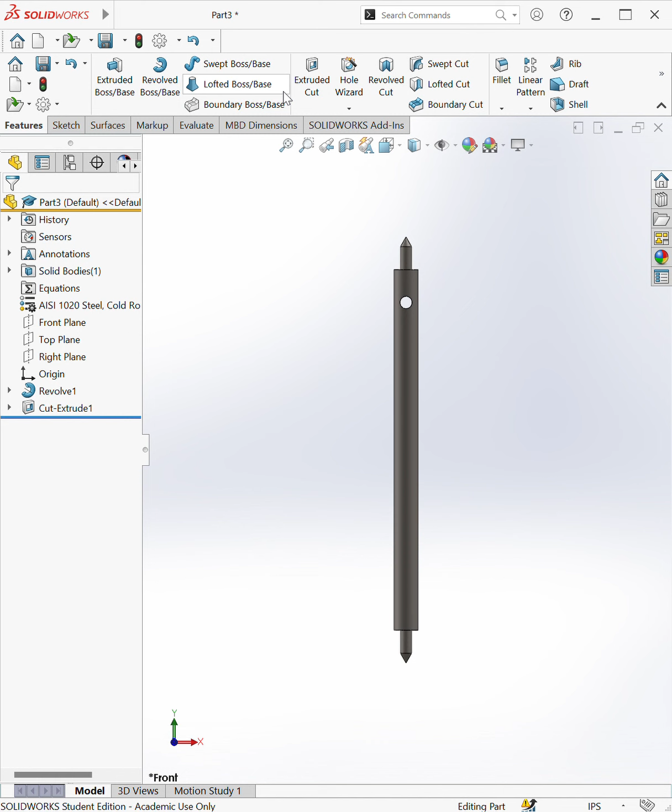So now we're going to add the material of cold rolled steel. Apply, close. Okay, so we're done with that. Save the part, Control S, as spindle. Since I already have a spindle, I'll save it as spindle 1. And we're done with the spindle.

So now we have these two parts to go, and then this ring. This part is basically the upper bearing. Okay, so new part.

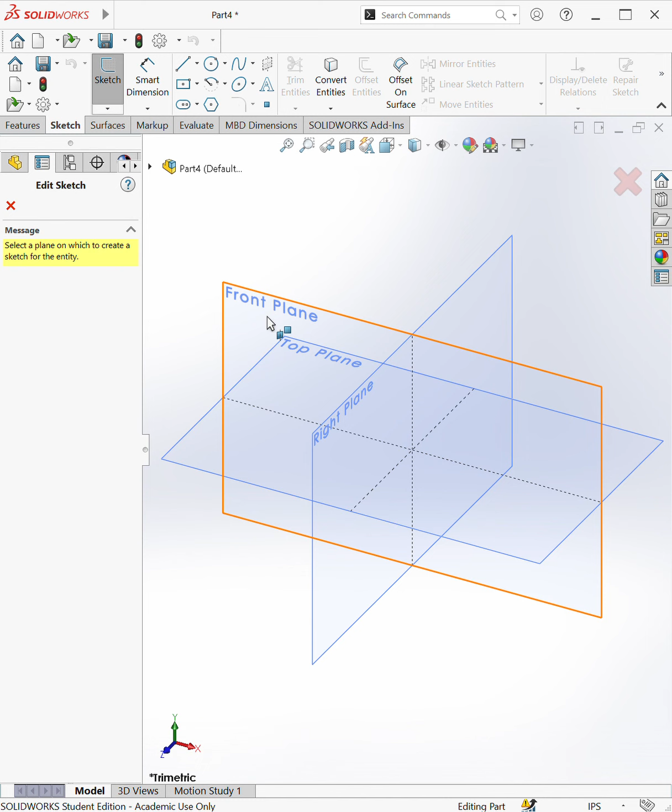Sketch on front plane. Okay, so we're gonna do revolves for both of them. They're both very similar, so yeah.

So what I'm gonna do is actually do a midpoint line here because I want it at the center. Actually, never mind, messed up. You want to really worry about design intent on the way you do things in SOLIDWORKS, because the way you do things really affects your final result and how much you can change your final result.

So try doing a center line with infinite length going vertical because we're going to revolve it later, and make the sketch for this. Ignore this hole for now and ignore the hidden lines. We're not going to worry about the thread, as it says here.

We're going to not do that call out. So just make the outline of this. Also don't worry about this because it'd be a cutout through the entire one part of the cylinder, not a hollow tube. So pause the video and see how you do. It's very simple, it's just this.

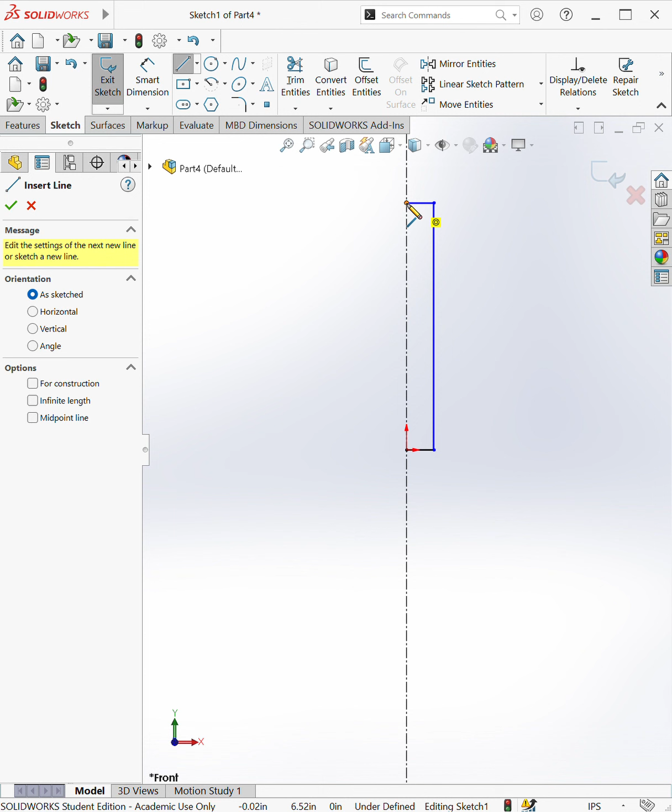If you want to avoid the intersecting error that we got last time when we were doing the spindle, you can complete the rectangle to make a full line. And now we're going to do the dimensions.

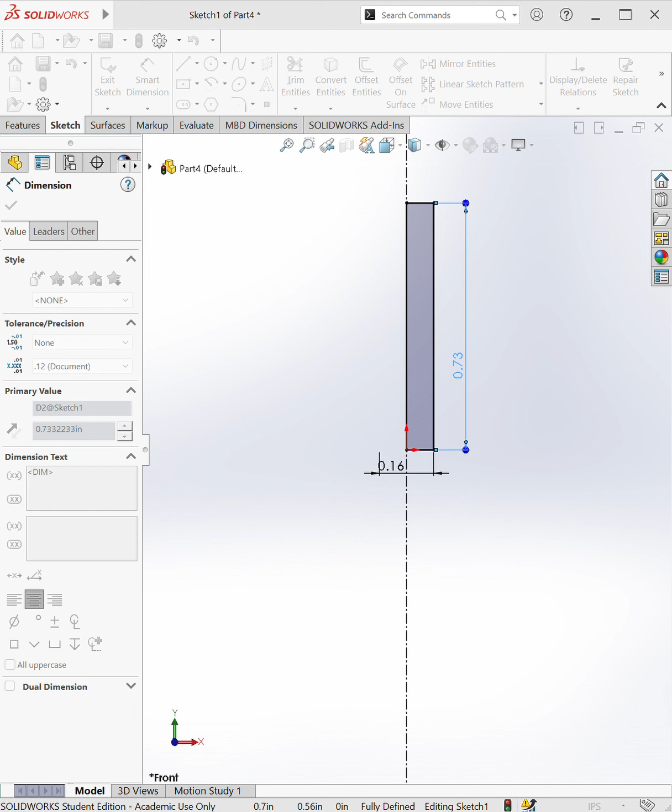So the width, or the diameter of this, is 0.164, as it says here. And then the height of this, you might say it's 3/4, but that would ignore this top part, which we also want, which is 0.125. So what we're going to do is 0.75, which is the 3/4, plus the 0.125, and that would be the revolve feature.

So we can do the revolve, that's okay, and we're almost done. We want that little cutout and then that hole. So to make that cutout, we're going to do a sketch on the front plane, and then Control 8 to normal to, and make a corner rectangle.

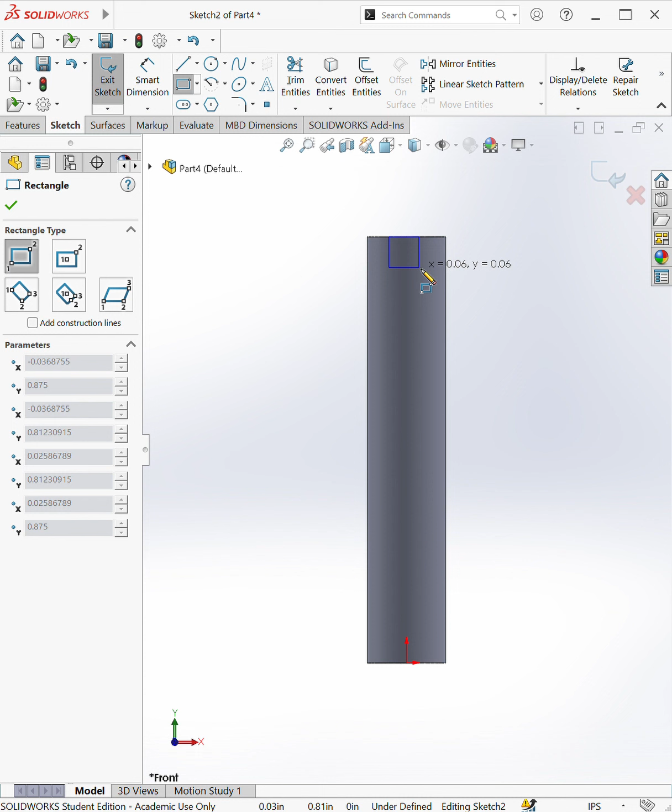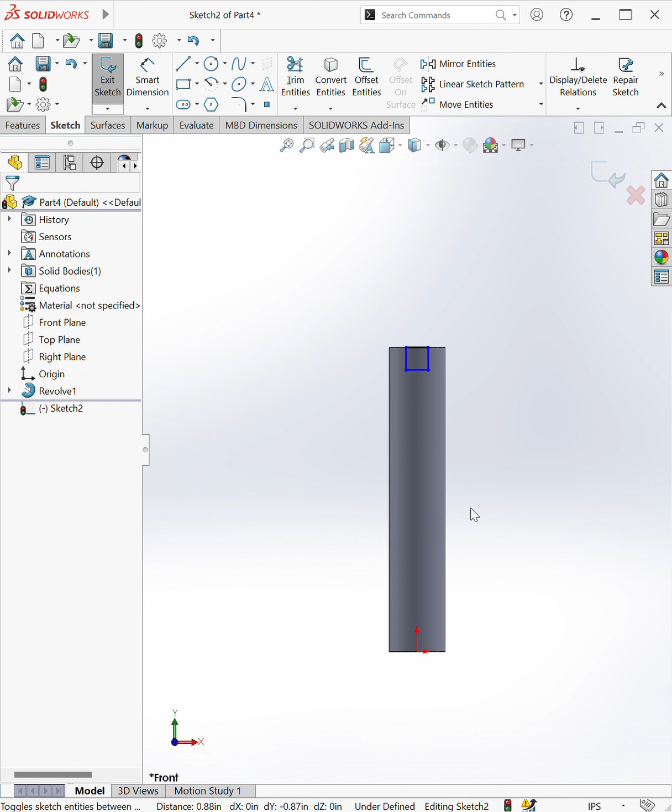Okay, and now we're going to dimension this. So the width is 0.055, and the height is 0.07.

Okay, now we're going to do an extrude cut. What's the trick then? Through all, both again, and press OK, and we got that little sketch cut out. This is what we want here. As you can see in the assembly, it would look something like that.

Okay, and now we're gonna worry about the little hole at the bottom. To do that, do the hole wizard, and for this one it would just be a normal hole. For the end condition, put blind, because it wouldn't go all the way through, it would go only to a little area.

And then here you should show custom sizing, because we're not going to use any of the sizes provided. So for the width, we're going to say 3/32, as seen in the diameter here. It would show a yellow highlight once you click enter, meaning that you changed or modified the dimension. And then for this, let's leave it at 118.

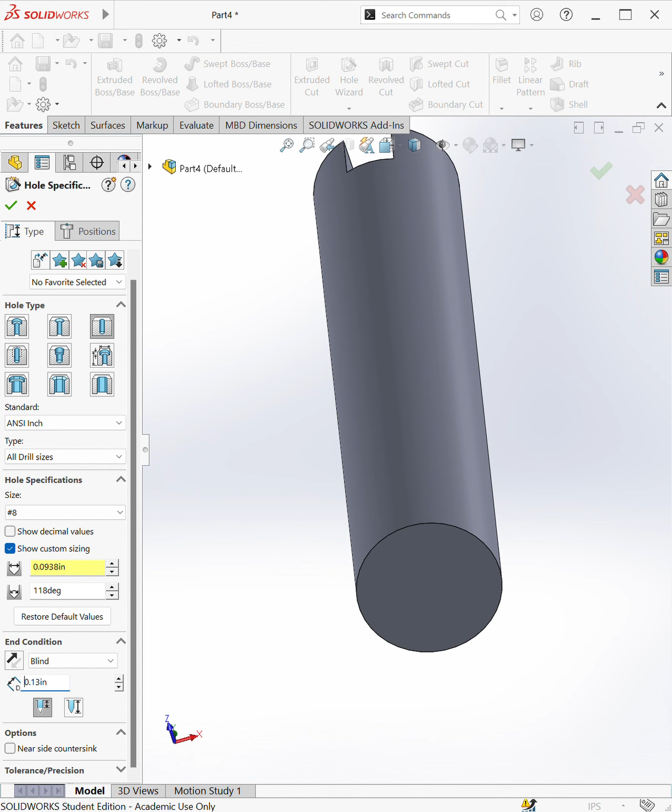For this value, it goes 1/8 inch deep. Type that in, and now go to positions. For positions, you want to click on this face and just click the origin point and click OK. And that would be it.

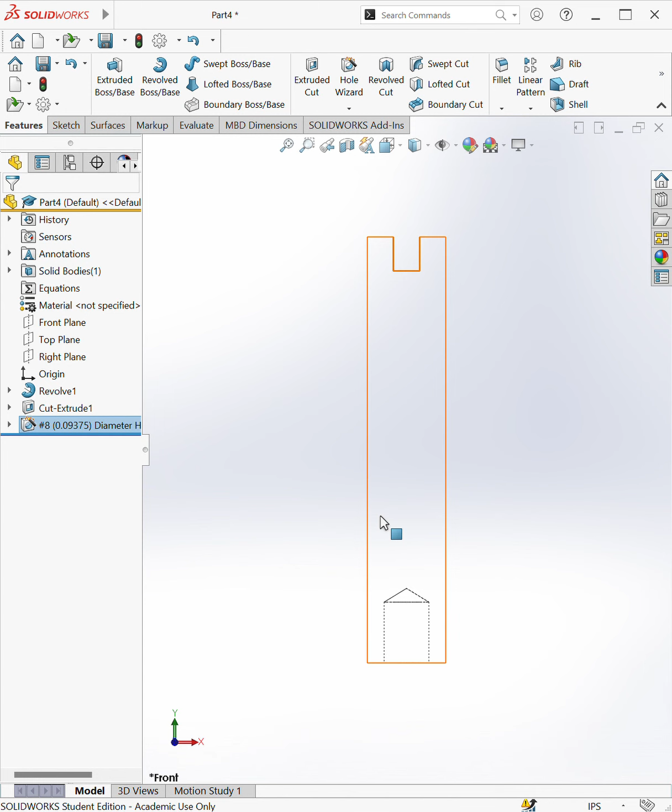If you want to see how the hole looks compared to this, go to Control 1, which shows you the front plane. Here you'd say display style, and you can see the hidden lines visible with hidden lines feature, and you can actually see the little hole that you created. Switch back to shaded with edges, Control 7 for isometric view.

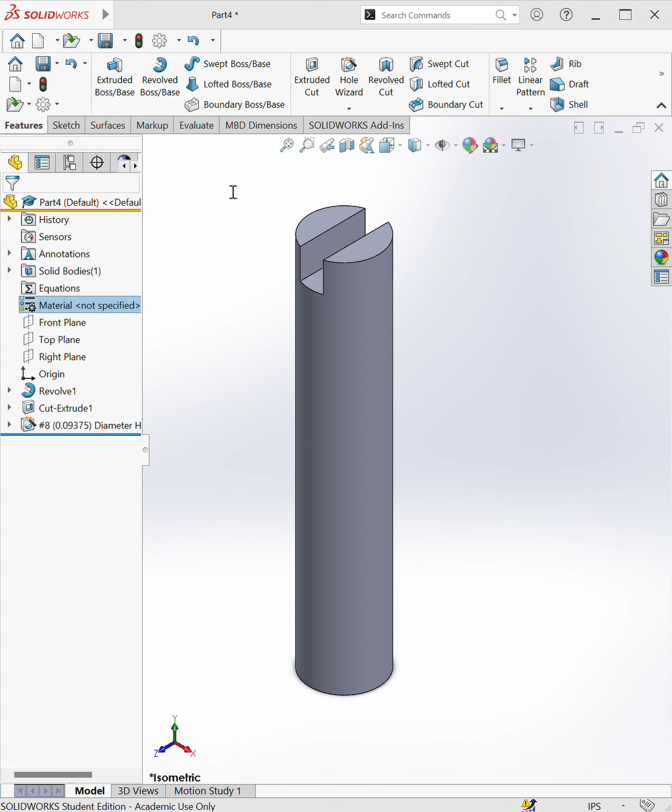Now we're going to write the material we want. In the assembly it says the upper bearing is brass, so we're going to put that. Edit material, brass - way too big. Another way you can do it is actually just right clicking, and here you'd see brass, and you can click that.

Control S to save and name it upper bearing. Since I already have an upper bearing, I'll name it upper bearing 1.

Okay, now almost at 2 more parts. We're going to do the lower bearing. It's very similar. So try yourself, and if you like it, then resume the video and see how it's done.

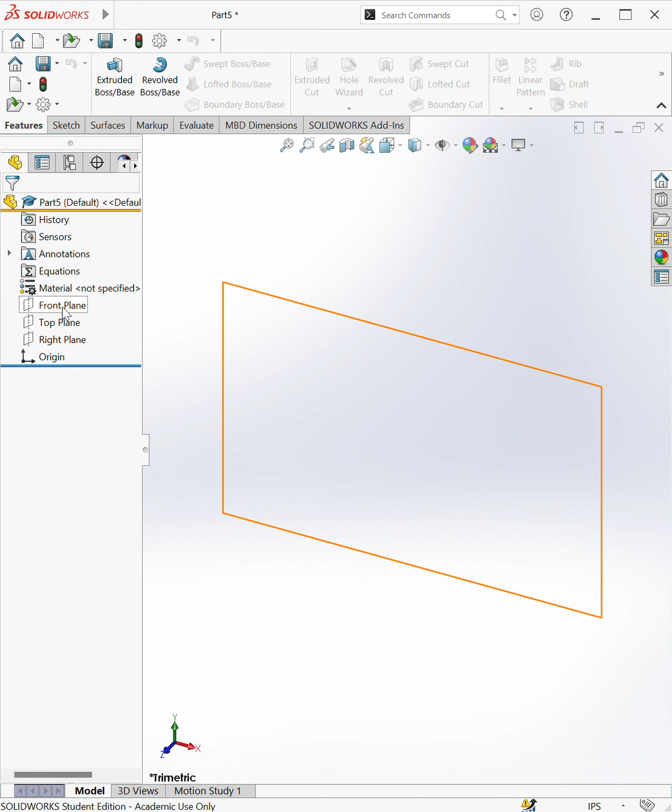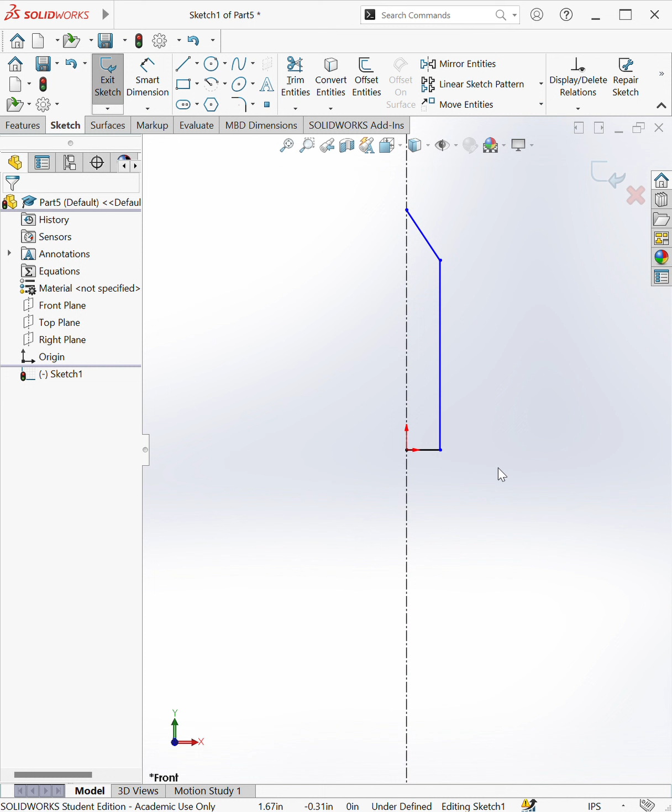First, we're going to do the front plane. Sketch, and then again do the center line, infinite length, vertical, and do the little thing, and then this one actually converges at a point, so put that. And now this point is also 60 degrees, so half of 60 is 30. And then the entire sketch is 3/4.

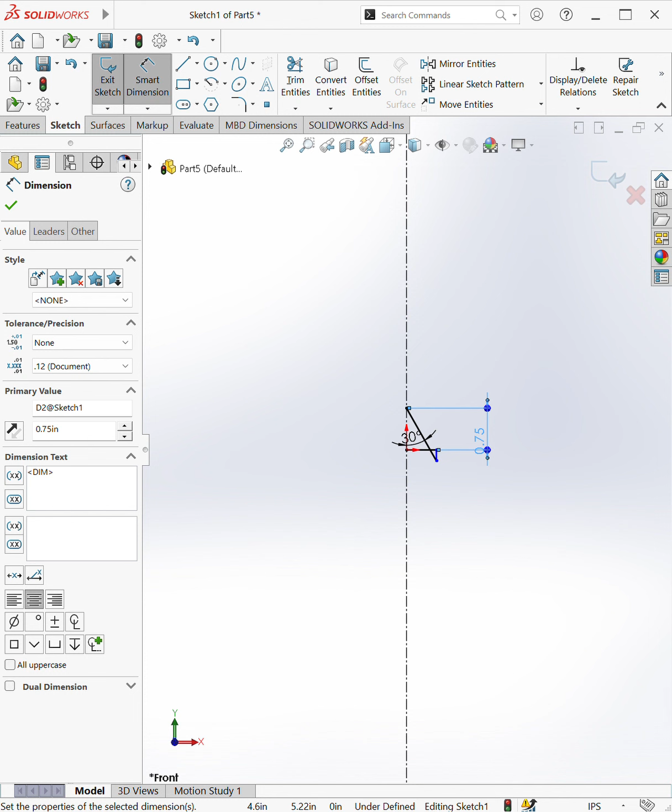For the width, it doesn't actually show here, but assume that it's the same as this width, or this diameter, which is 0.164. As you can see, my sketch kind of messed up. Don't worry about it, you can just drag the points around until you think it's right. It happens a lot. So to make this, you can click on the line, click on the center line, click on the opposite end, and do 0.164.

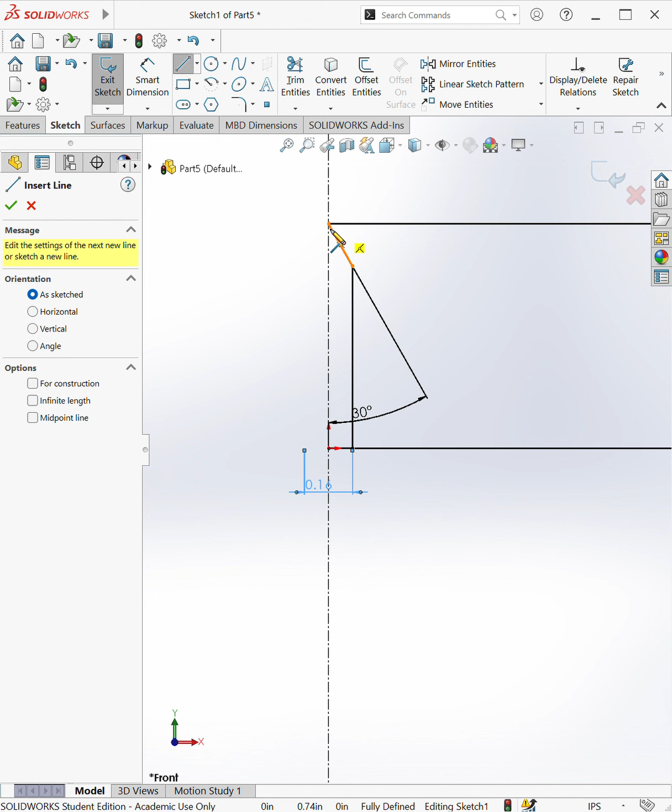Now if you don't want the intersecting error, you can just click yes if you want, but if you don't want to see the error ever, you can just close it. Now go to Features, Revolve Boss Base, and click OK.

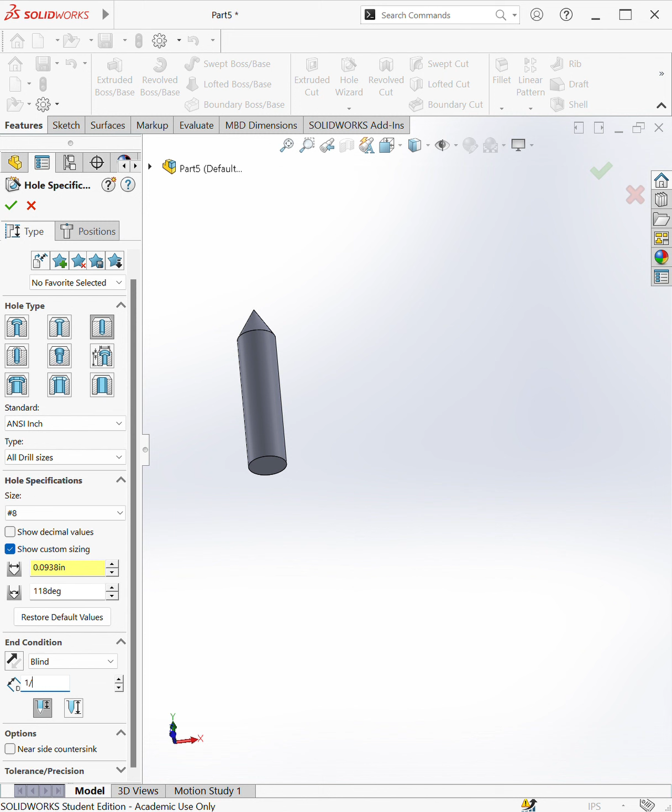And then positions: look at the face, click the origin, click OK. If you want to see how it looks, go to Control 1, Display Style, and click Hidden Lines Visible, and you can see the little hole that you created. Again, don't worry about the hidden lines on the sides - those would be the thread callouts, not necessary for this project.

Control S - actually, let's save it first. Lower bearing. And since I have a part named lower bearing already, I'll name it lower bearing 1.

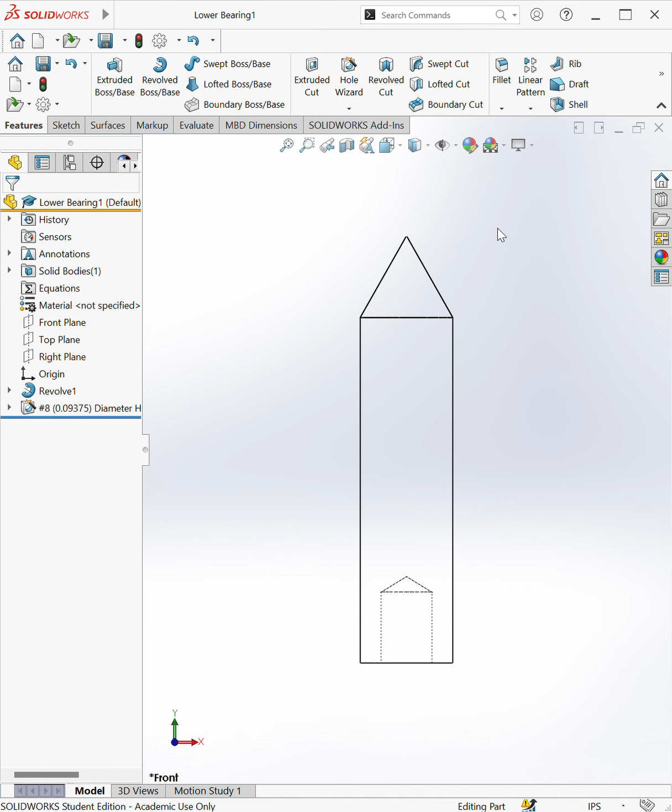So again, go to your solid display state, Control 7 for isometric view. This one is also made of brass, so you can either go to edit material, search for brass, or just go right here and click brass.

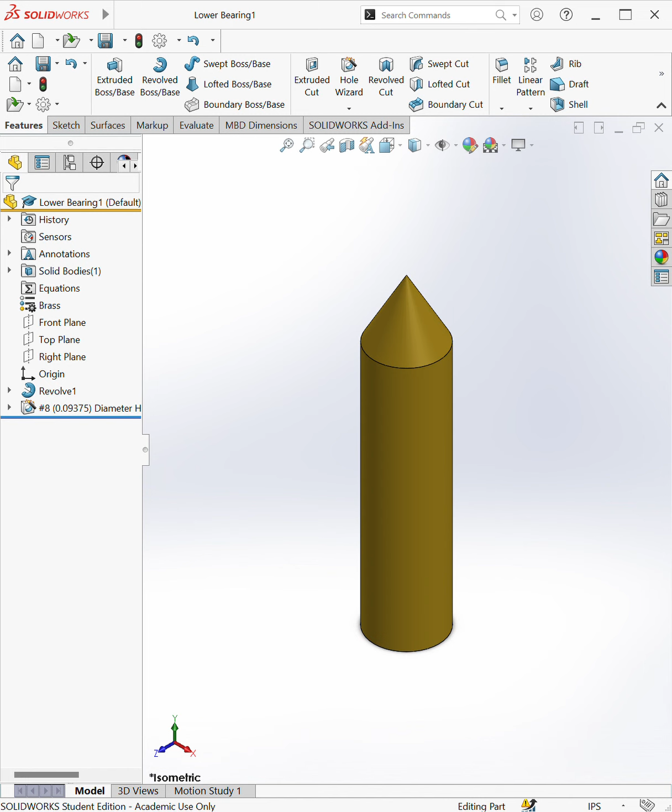Control S. Okay, final one is the ring, easiest part to make. So new part, IPS. Okay, try doing this.

It's pretty easy to do. If you are having trouble, you can watch the video.

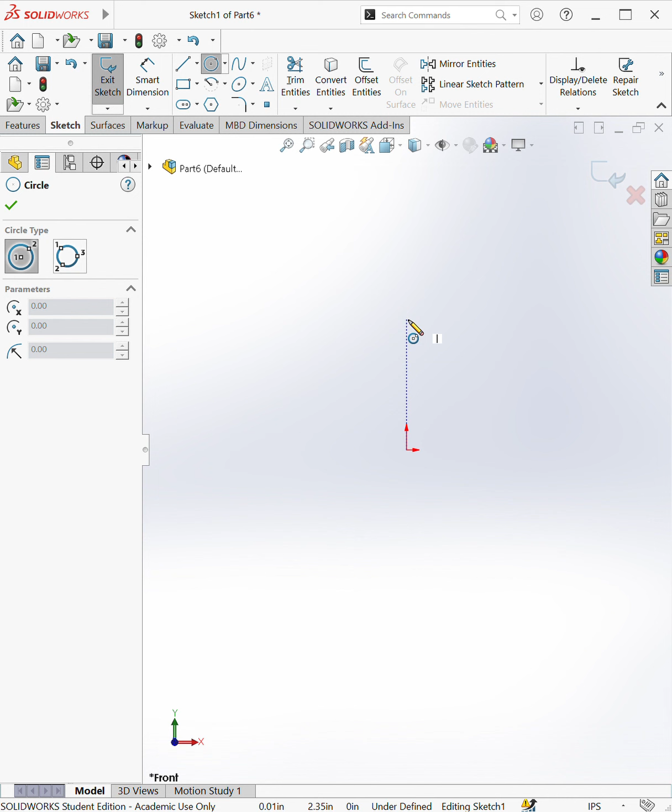Now go to front plane, sketch, circle, make it vertical when you see the white vertical relation, make that circle, and then actually put that relation in. So click the center point of the circle and the origin, vertical, and then dimension it to be the radius of 1.95.

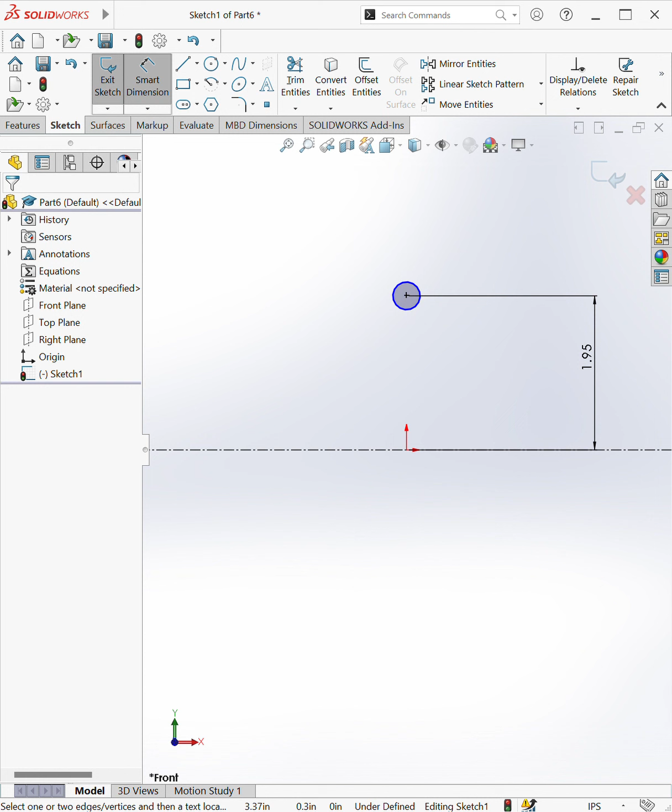You also want that center line for revolve, so go to center line, infinite length, and then make that horizontal line. And now we also want to dimension the diameter of the circle, which is 5/32.

A question I was asked is what these lines are for - they're just sketching lines, don't worry about it. So now that's it, we're done. We can revolve the boss base around, and you would see the circle.

And that would be that. The outer ring is also steel cold rolled. So edit material, cold rolled, apply, and save this as ring, or gyroscope ring 1. Or for me it's 1 since I already have the part. Okay, we are done with the parts.

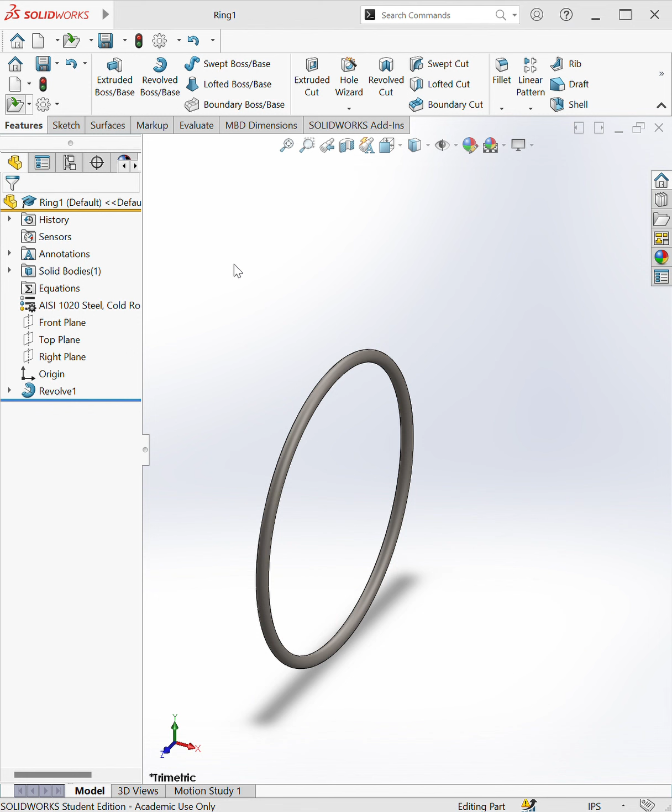But we are not done yet. We still have to do the assembly, which is really hard to do. Go back to this frame, so click open and go back to your gyroscope frame. What we want to do is make some references to make it easier on ourselves.

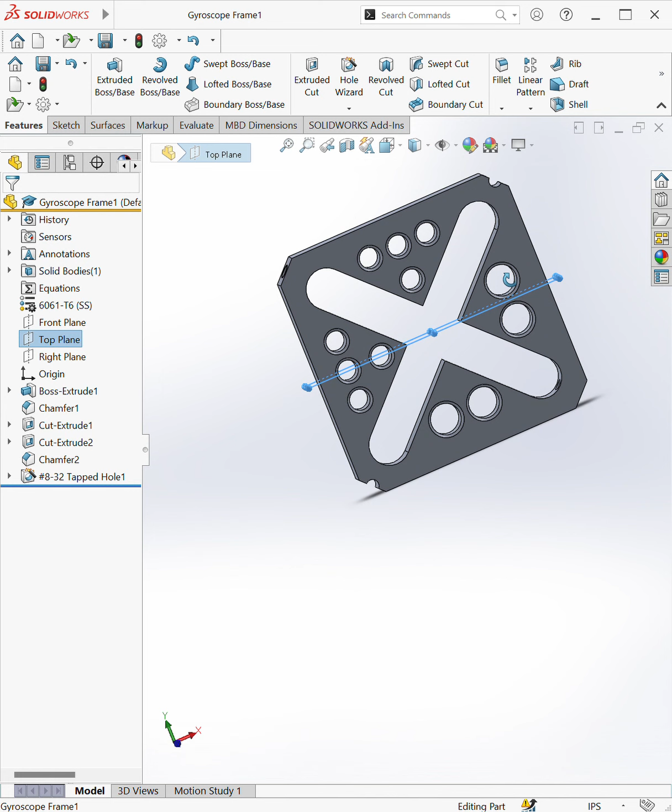As you can see, the front plane is actually at the side over here, which isn't really good since it doesn't show us anything. The top plane is right in the cross section of where we want it. We want our top plane to actually be here. The right plane is this way when we want it to be here.

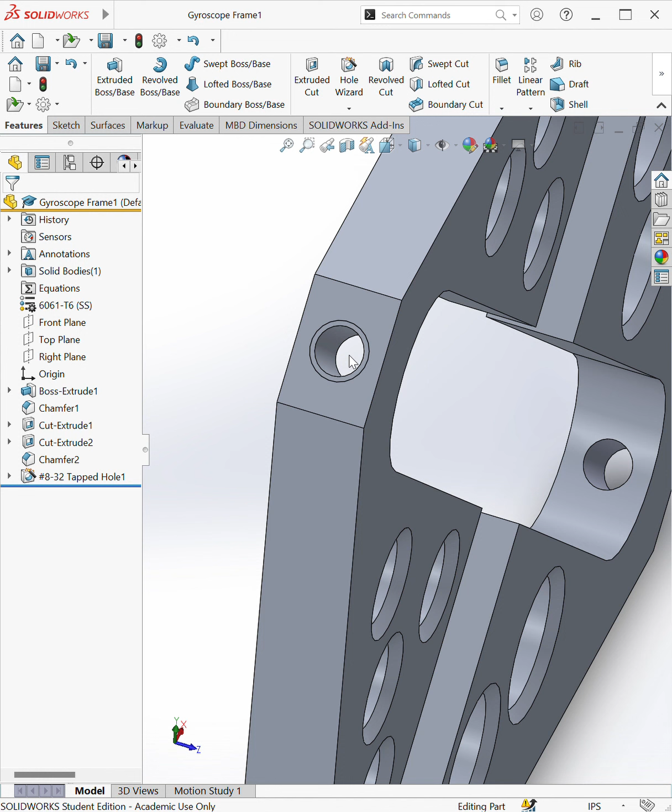So we want to change those references, or make new ones, to make it easier to do our mates. Another thing is it's really hard to do a concentric mate, so maybe we want an axis to go along this edge. Let's do that.

This is the main tool we're going to use for the rest of this: reference geometry, then click the plane function. We have the first reference, second reference, and third reference. Usually we're just using the first and second.

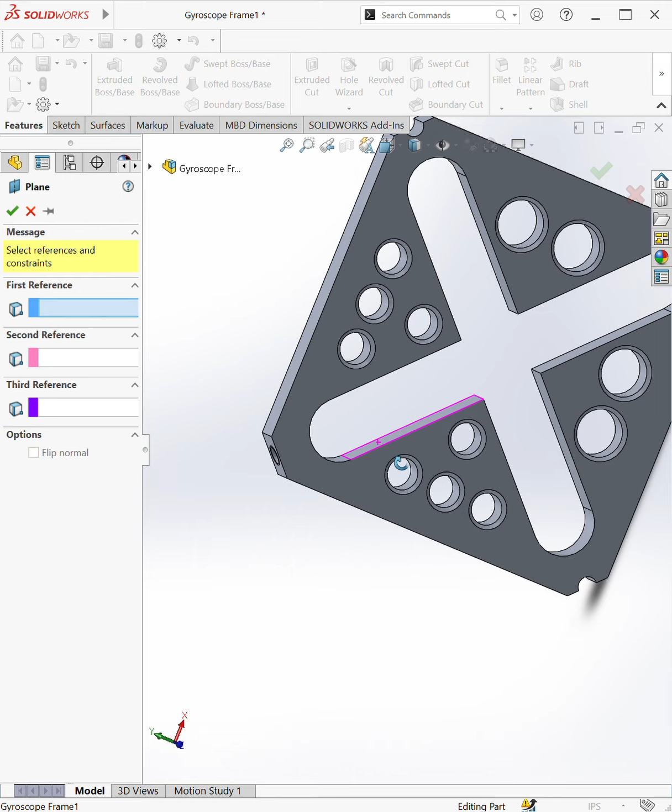So here we want to have this plane in between. That's going to be our top plane. Or actually this way, right? Because the spindle would go this way and the rotor would turn this way. So this is going to be our top plane.

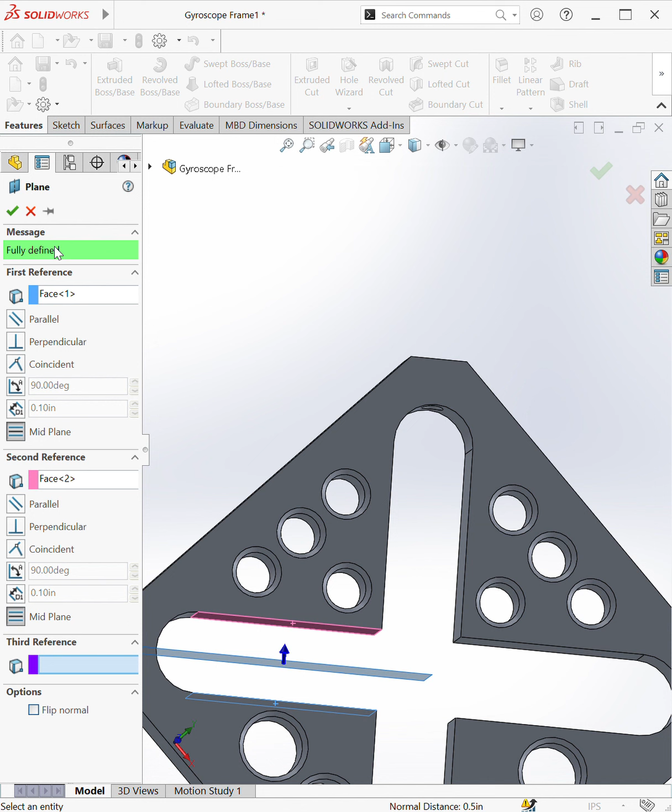To make that, click the bottom part of your frame, then the top part of your frame, then click OK. It says fully defined in green, meaning we're good. If you want, you can drag it out to make it bigger. And if you want, you can click, pause a little, and click again. Now you can rename the tree item. Make it top view.

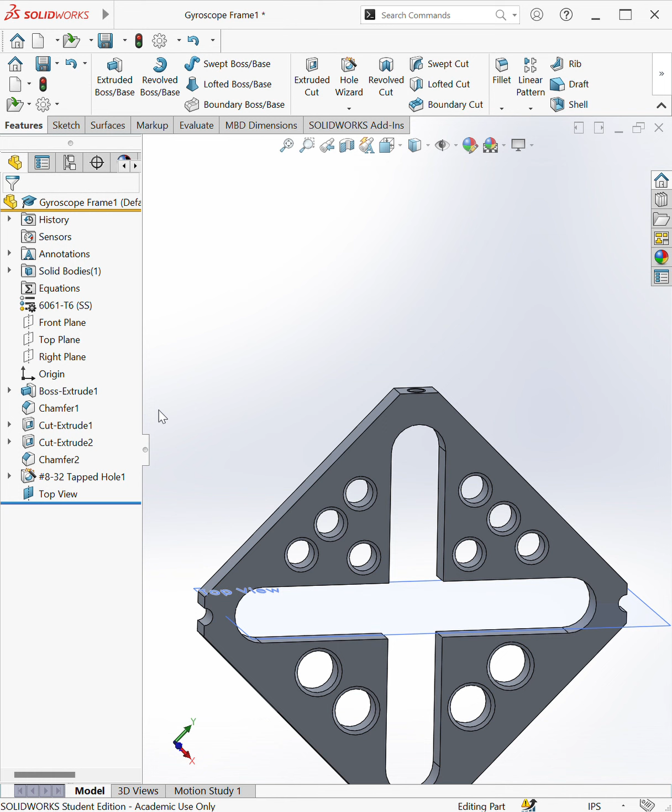Now try doing the same thing with front, which is going to be in the middle of these two plates, and the right view, which is similar to what we did for the top view.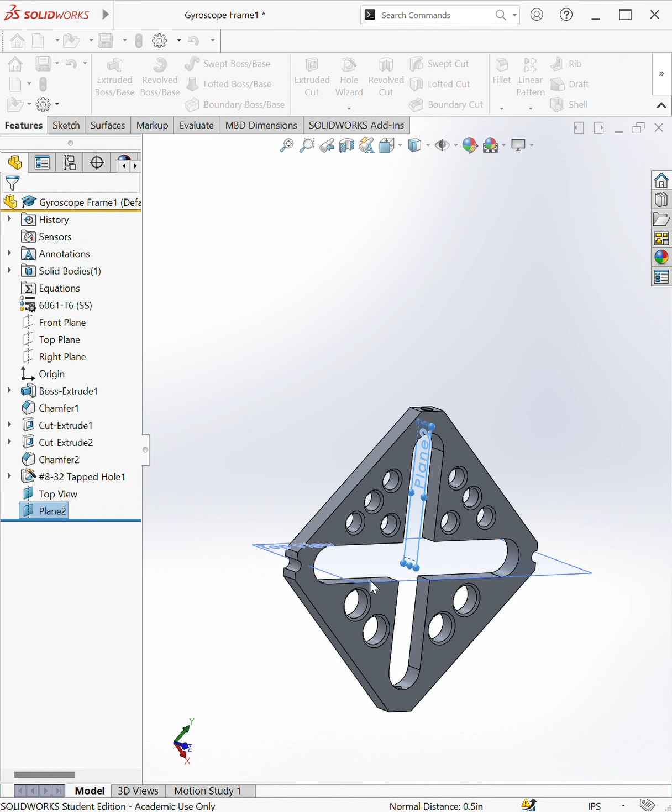Now I'll show you how it's done. So, right plane now. For that, we're going to click this, and click OK. If you are having trouble, maybe you should exit and try again. So click, pause a little bit, and click again. Sometimes it doesn't work, you can pause again and click again, and it would usually work.

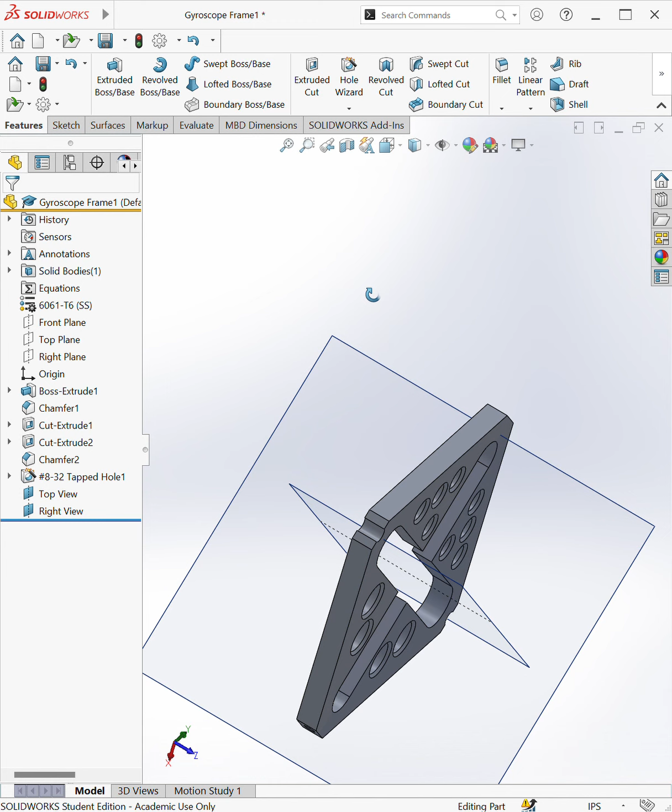Right view, and click outside. Now you got your right view done and top view done. Now you just want your front view. To do that, go to reference, plane, click the front part, the back part, and you got your front view there.

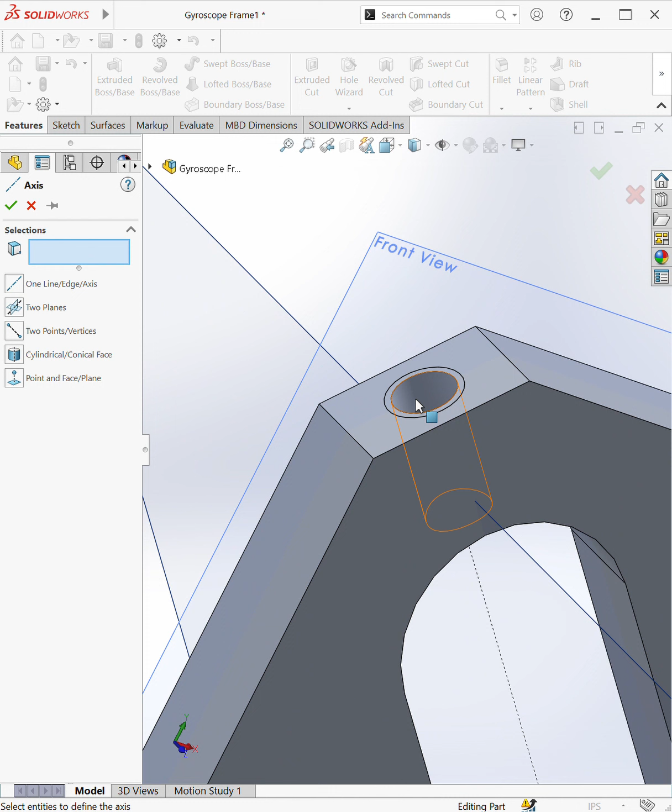Click front view. Alright, we're done with the planes. Now we can do the reference axis. Here, just click this little circle and you'd be done. If you want, you can drag it out so that it's easier to see. I know it looks like a mess here, but trust me, it's so much easier to use these than to do anything else. Okay, now save this part. If you do any more reference geometries, you could do it if you want. Always remember to save, because SOLIDWORKS crashes and yeah.

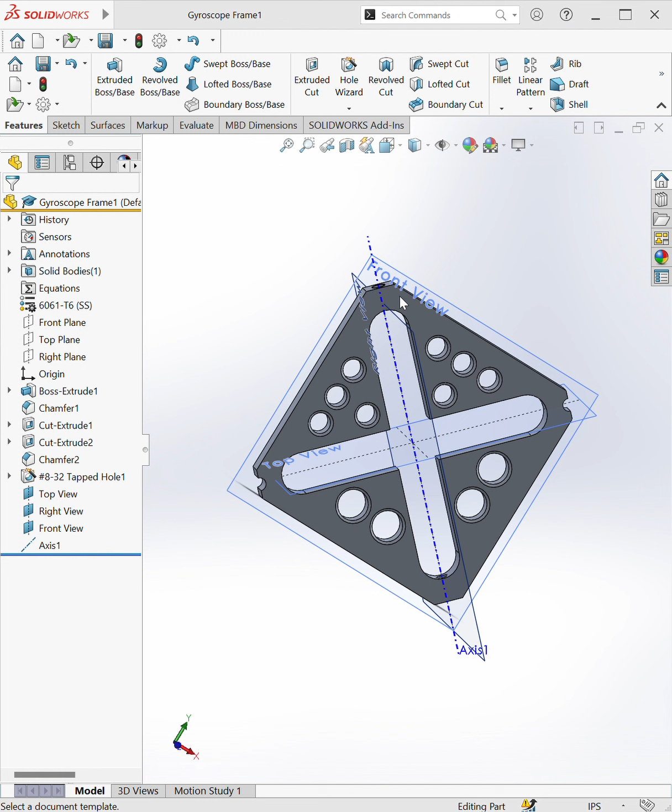Okay, so now open another part, which is... actually, I think we're done. That's all we need to do. We can do it in the new, right next to the drop down menu, you can say make assembly from part, and then click on the assembly. And the first thing that's going to show up is the frame, probably. If it doesn't show up, just click the OK button here, and usually it does show up.

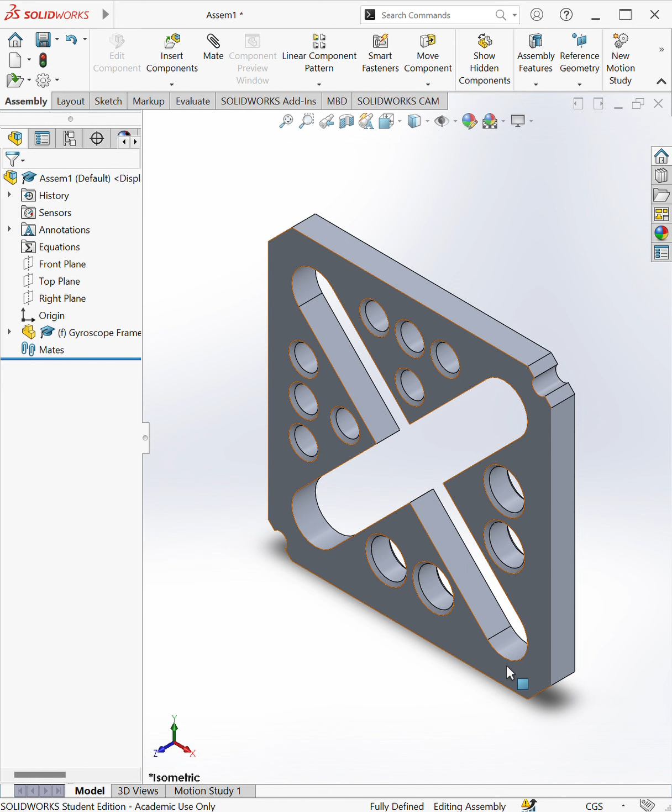So right now we have a problem. You see the F in parentheses, that means this part is already fixed, meaning you can't move it. But in the isometric view, which we're in right now, it shows as if it's turned. We want it to be this pointing up and this pointing down. It's showing this because the front plane is actually coincident with this front plane, top plane with this top plane, right plane with right plane. We don't want that. We want this front plane to be with this front plane, this top with this top.

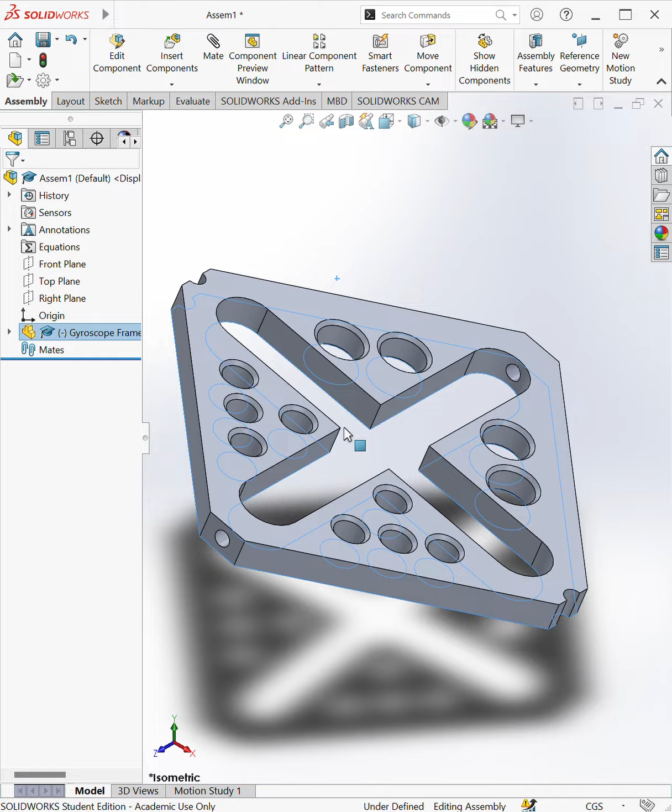To do that, we simply right-click on the part, float it, so that means we can move it around, rotate it however we want. Left button to move the part, right button to rotate the part. Mouse buttons. Okay, now we want to fix this, right?

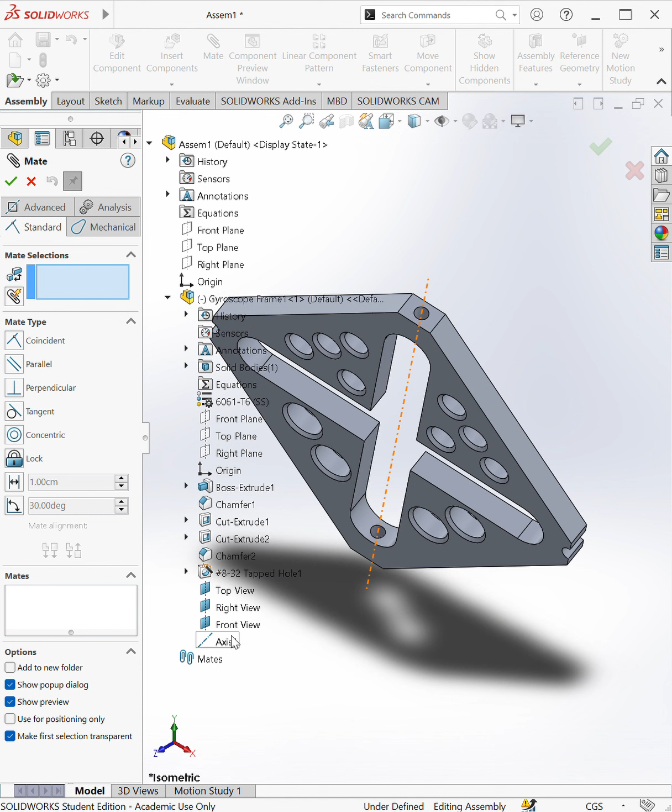Click on the mate function, and now go under this feature tree, go under Gyroscope, click the front view, and make it coincident with this front view.

This menu pops up, just click OK. Right view with this right view, click OK. You can also click the OK over there. And then top with this top, and then it should also be coincident. Click OK.

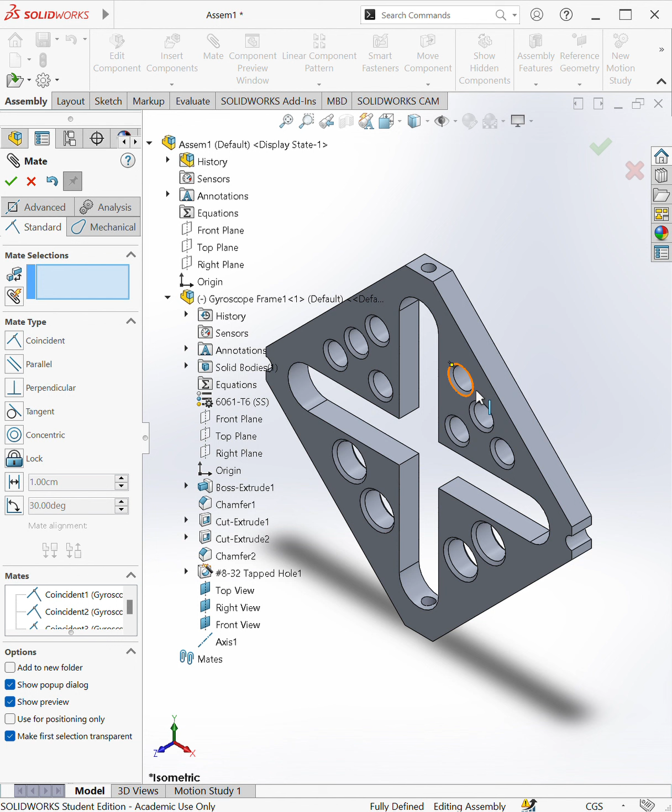Okay, now our frame is fixed. You can't move it anymore. I'm trying right now, and you can't rotate it or move it, meaning it's fully fixed. If you want, you can exit the mate tool by clicking the X or the check mark. It doesn't matter. If you also want, you can actually fix it so it doesn't move anywhere.

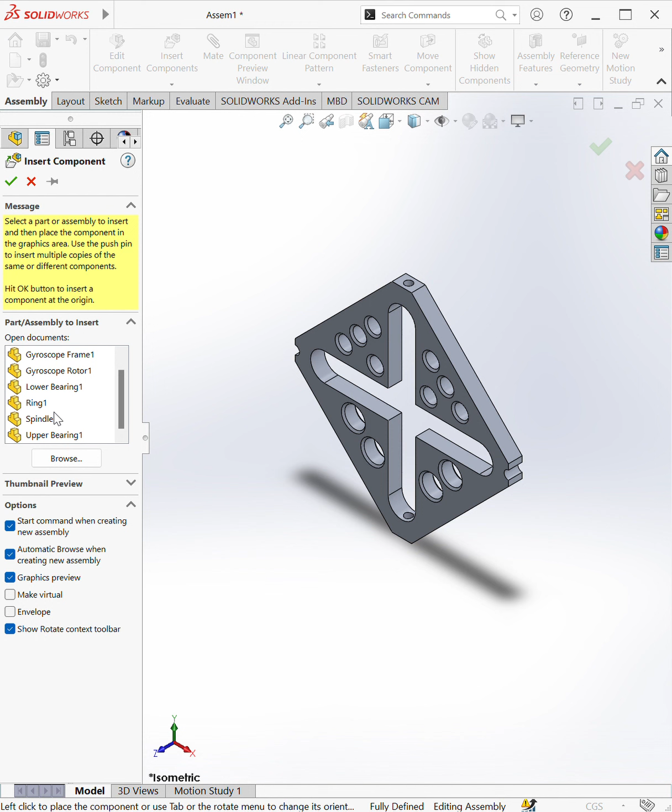I'm not going to do that because I trust my mates. I can do another insert component, and now we're going to put in the rotor, this one. You can click and drag to put it in, or you can just click, release, and then click wherever you want to put it in.

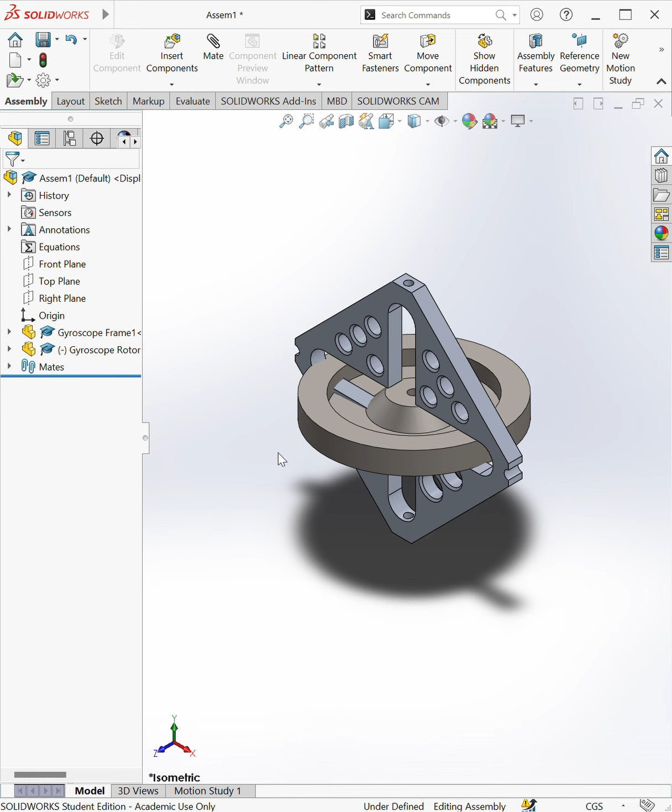Okay, I'm going to rotate this part to be like what I want it to be, like that, and then move it a little bit to be about where I want it to be. Now remember when I said I wanted it to do a midpoint line because the plane will be right in the middle, which makes it easier doing assemblies.

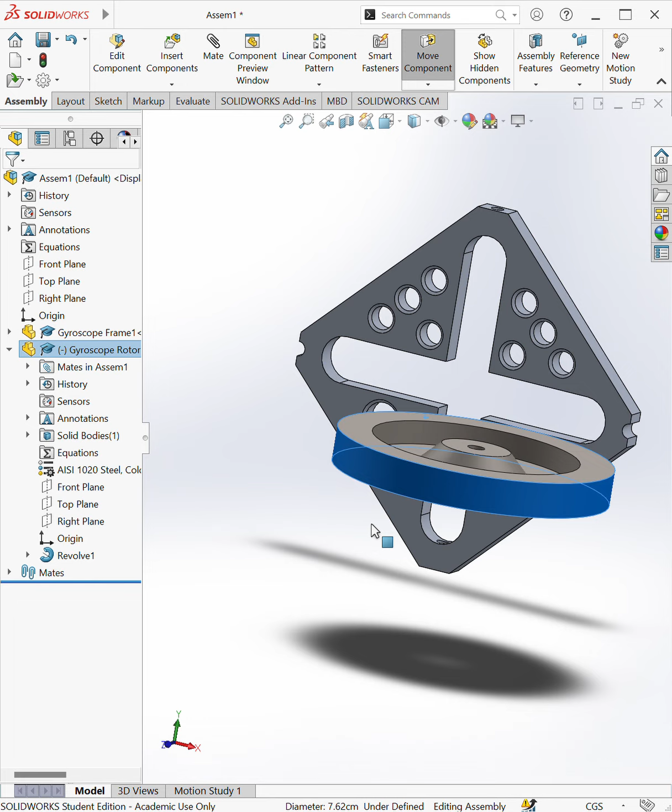Now you can use that. This front plane is actually coincident with this top plane, and that makes it so much easier. Now it's like coincident. It won't go down. It would only go sideways.

And the second thing we can do is in the gyroscope frame we have that axis button. That axis, click that, hold control. This is how you can do mates outside of the mate function. You can hold control and click the two planes. Like let's say I want to click this and I hold control and click this. I can do, and then stop there and hover for a second.

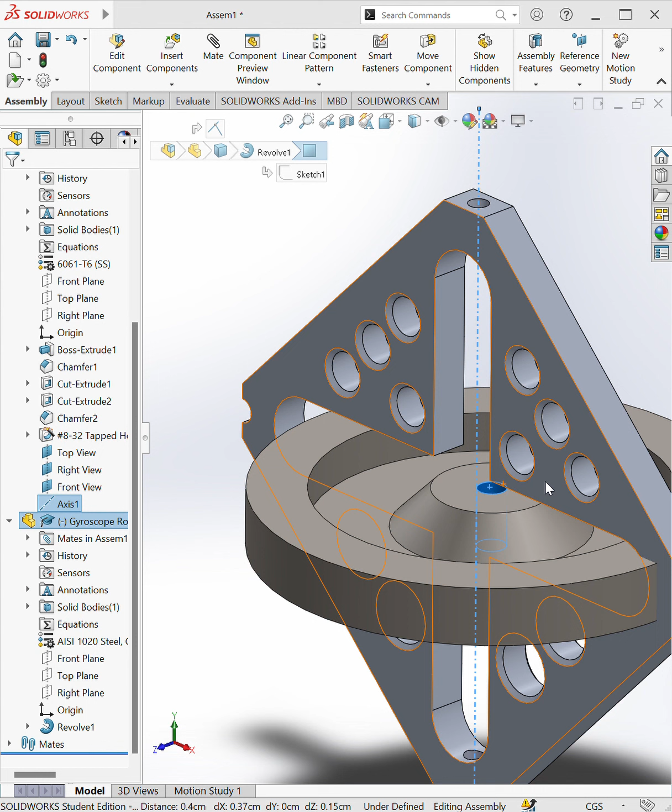It'd show me this mate toolbar. I would do concentric here, and now it's like axial with this, meaning it can only turn, but it can't move anywhere. We want it to turn because that's how gyroscopes work, but we don't want it to move because that's not how gyroscopes work.

Okay, so now we can insert one more component because this component is done. Let's insert the spindle. I'm just clicking it and then releasing here.

Okay, so now we want this spindle in relation to this rotor. So whenever this rotor turns, we want the spindle to also turn. To do that, you can click the face of this and then click this face as well, or any circular thing here, and hover for a second and you would see that mate toolbar. Click concentric, and now it's concentric, but it slides up and down.

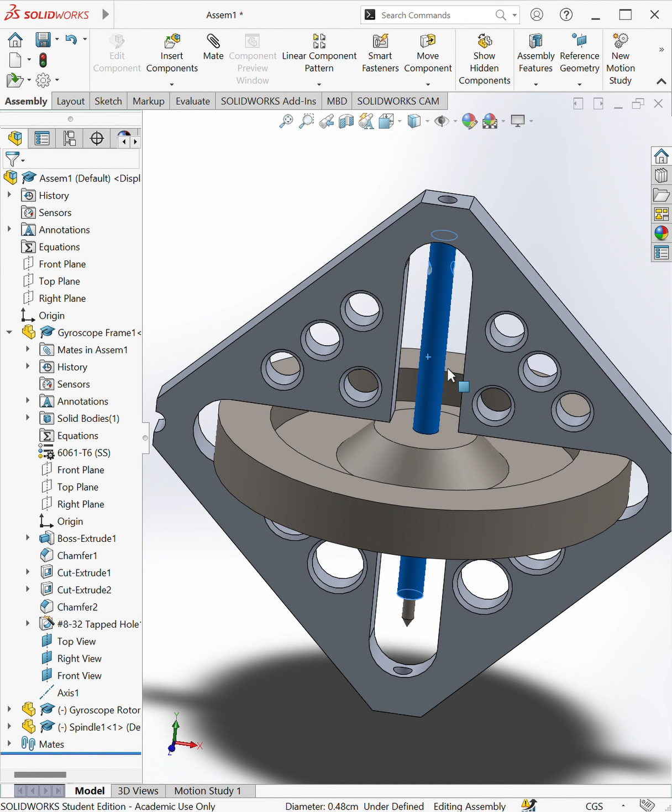That's fine for now. Okay, what you want to do here is go down to the mates function, and here you'll see all the mates that you did so far, all the coincident mates and concentric mates. Go to the bottommost mate, that's the mate you just did, which is the concentric mate with the rotor. Right click that and say edit feature, and here you can do a lock rotation.

This means that this rotation is locked. The concentric mate will not move, meaning whenever you turn the spindle, you also turn the rotor, or whenever you turn the rotor, you also turn the spindle. They're locked in rotation. So now, whenever I turn the spindle, it turns, or whenever I turn the rotor, it turns the spindle. Whenever I turn the spindle, it also turns the rotor.

But now it still moves up and down. To solve that issue, you can go down to drop-down menu. We'll exit this for now. Go to spindle, and then you see when we did that mirror, what it allowed us to do is our top plane would be right in the middle of our spindle. So we can do that, and then make it coincident with this top plane, and click OK. And now it's not going anywhere, except turning like it's supposed to.

Okay, now we're going to insert another component. Sometimes it's good to clean up by pulling up the drop downs, so it's easier to see like, oh, this is the frame, I'm done with the rotor, I'm done with the spindle, and now I can insert component. And then let's do the ring first.

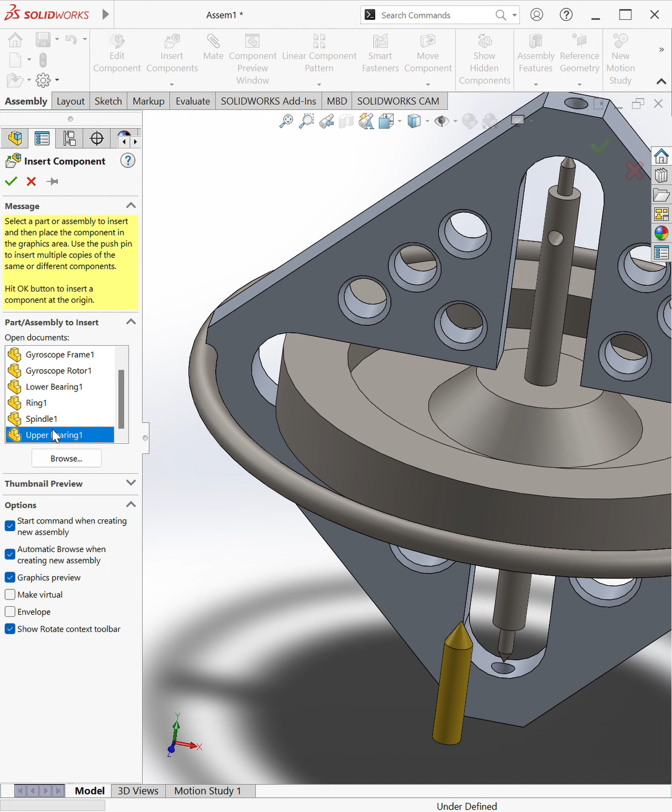So finally we have two more to go - one is the upper bearing and the other is the lower bearing. So again, insert component, we're going to do the upper bearing first. And then we're going to again insert component and do the lower bearing as well. And now we have all our parts in the assembly, we just haven't assembled it.

Okay, so now quickly let me show you the faces control mate. So click the face that you want, hold control, click the other face, and then make it concentric.

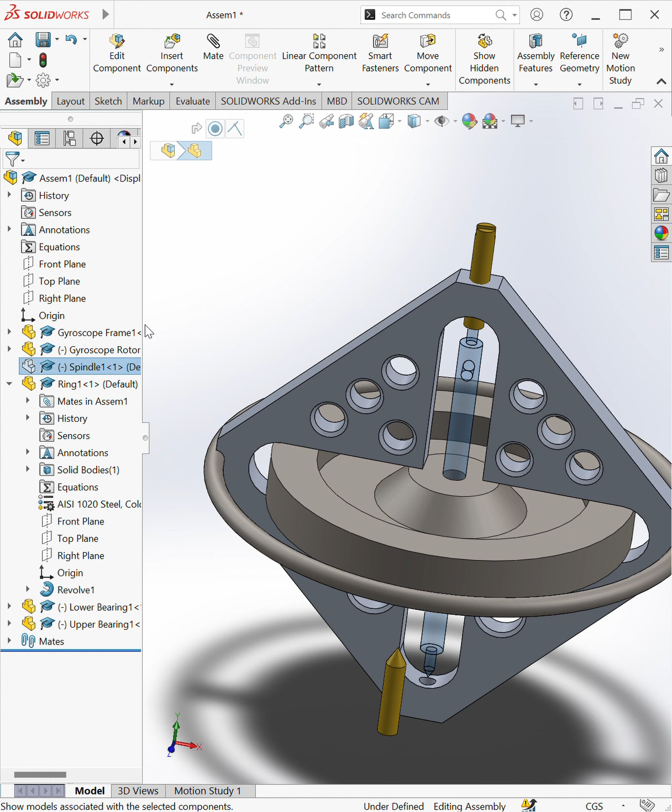Sometimes it does this where it's hard to see where you want it, where it is. What you can do is click your actual part, and then pull it upward like that. Sometimes you can also click the tab key and hide the parts, then pull it out, and then do shift and tab to unhide it. You want to click where it is. In case you can't find where it is, you can go back to your feature manager tree, click the part that you just hid, and then you can say show components and it's going to show up again.

Okay, now we're going to get to the complicated parts, but before that I want to also do this. So I'm going to rotate this by using the right mouse button and then make it concentric again.

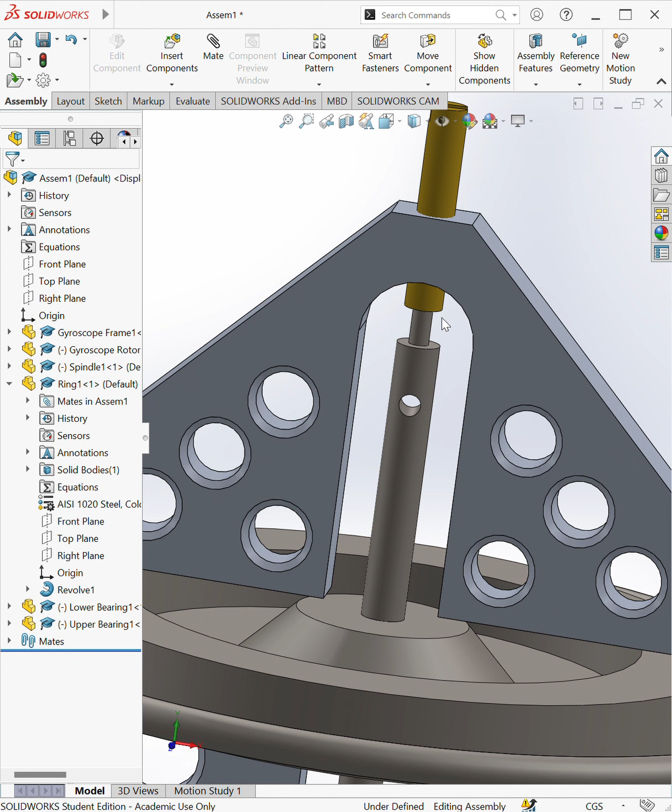Okay, and then now we're done with that. What we're going to do is control 1, display states, hidden - or yeah.

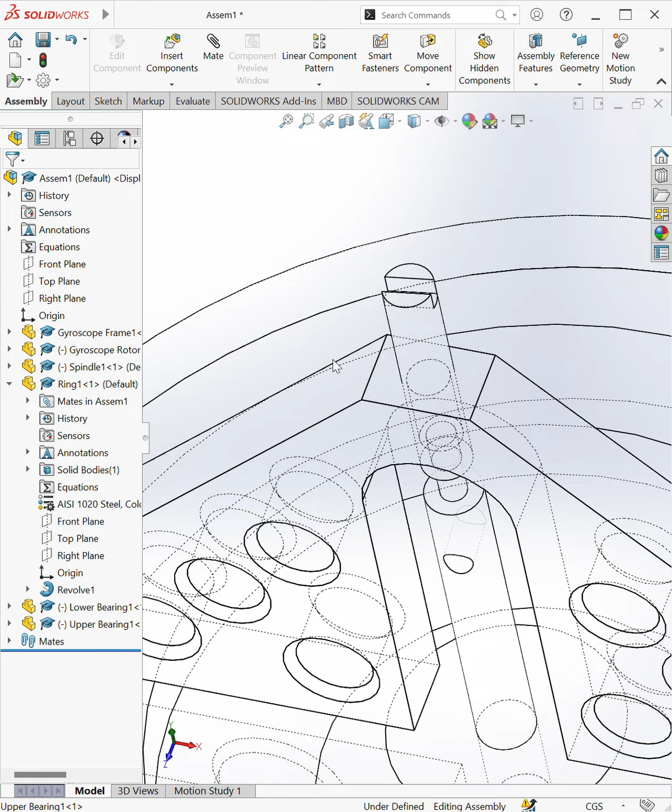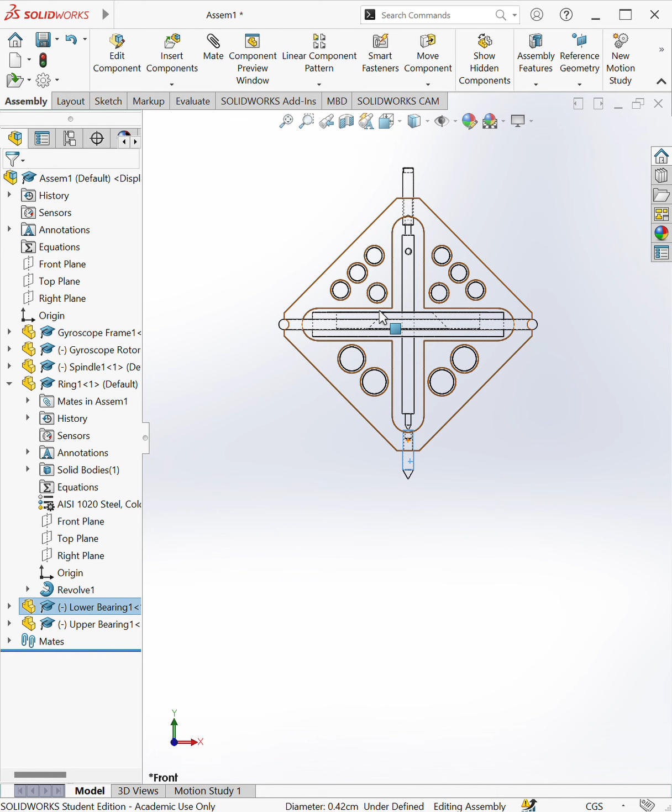This is why I want to do this - because if you see in the assembly, these faces are not coincident with each other, there's a little gap. That's because this cone over here would be coincident with this cone over here - this point would rest on this point, and then at the bottom, this point would rest on this point. Yeah, these two would rest on each other.

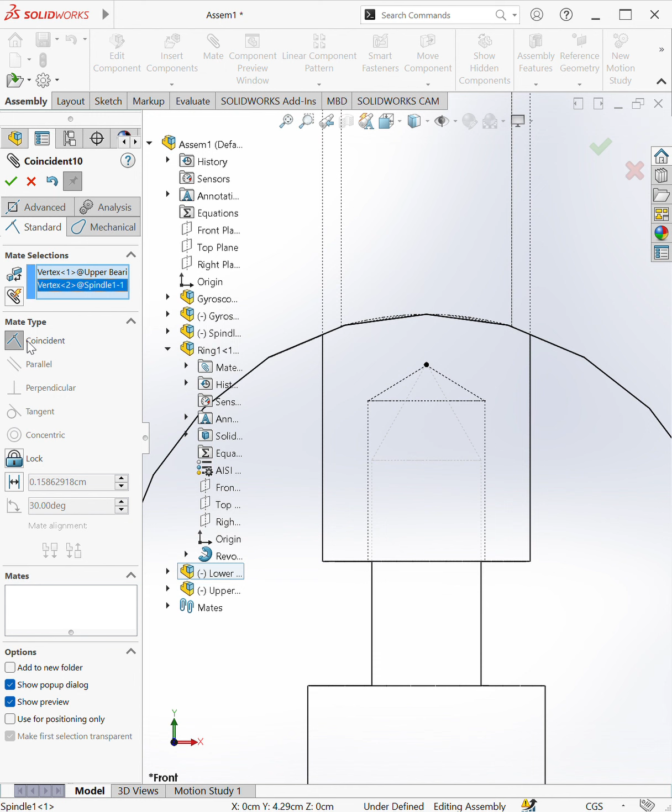So to do that, we're going to go to Mate. If you click the face before, you can clear selections by the way. We're going to click on this point over here, then right click, select other, and try to click on this point, and that would be coincident. Click OK, and then we're going to do the same thing on the other side - that point, I think, no, that point, and then that point - coincident, okay.

Okay, now go back to the display state, control 7. Actually, we want to save this - we should have saved this a long time ago.

Rename it Gyroscope, and then make it Gyroscope 1. But we're not done yet. There's one more step that we want to do, which is these things still turn.

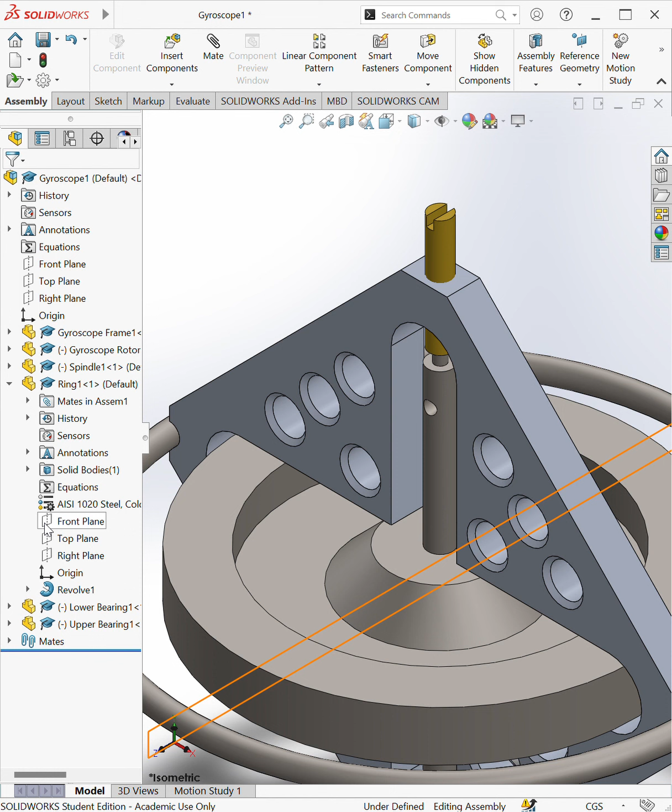We don't want them to turn. It's fine if you submit this way, it doesn't really matter. But if you're built different, then you want to fix it.

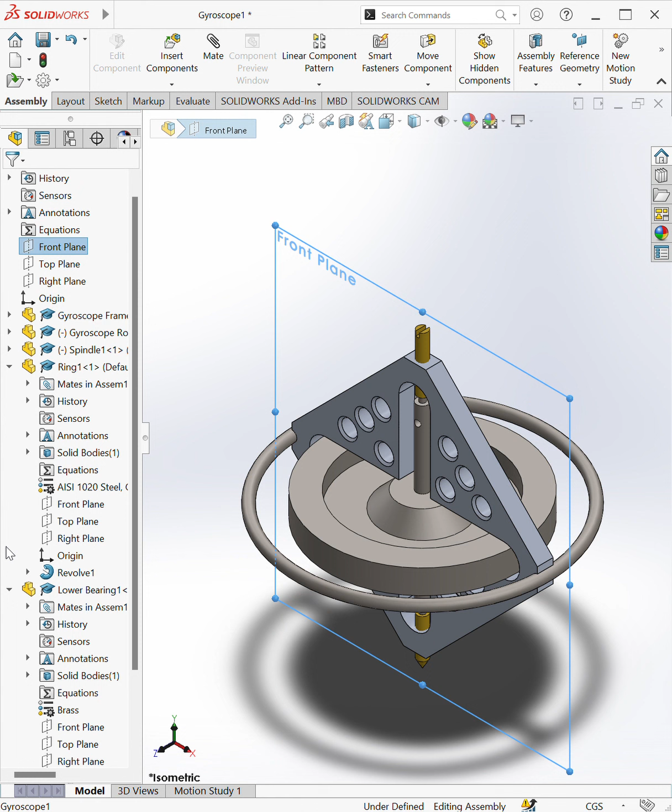So you can do the front plane and then go to the lower bearing and click the front plane there. If you click the front plane and this front plane and make it coincident, and then again front plane and your upper bearing front plane and make it coincident, you'd be done. Hold control, save, and congratulations, you finished.

Wait, no, you did not finish the part yet. There's one more thing that you need to do. The two hex nuts at the top and bottom.

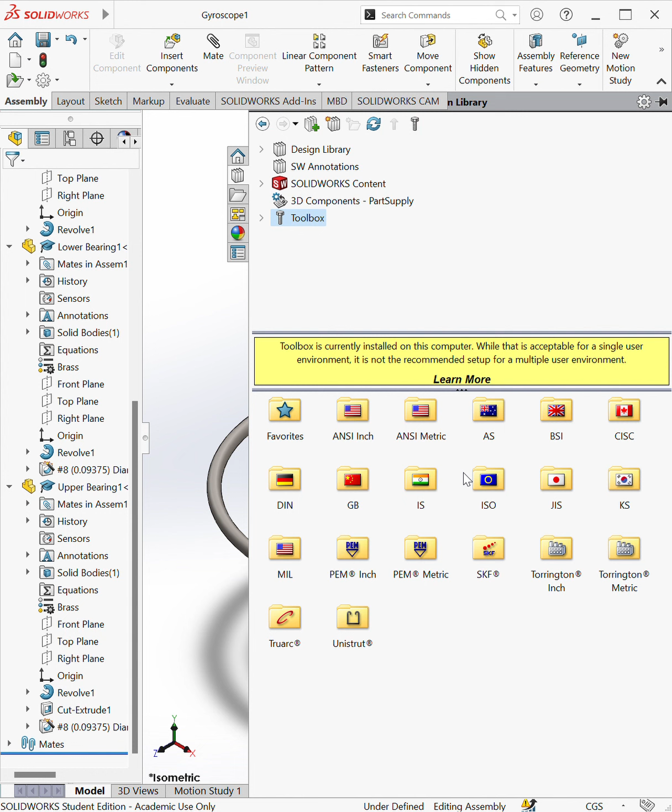Those are just suggestions. In here, you can go to Toolbox. In Design Library, SOLIDWORKS already made them for you, so you don't have to make this part. You can go to Toolbox. Sometimes it says Add In Now, and it's just going to download the assembly files.

Now what you're going to do is go to ANSI inch, nuts, and then go to machine screw, and then go to this machine screw hex nut, and then drag it. Do not place it anywhere, just click your mouse button and hold it. If you did release it like this, click the X and try again.

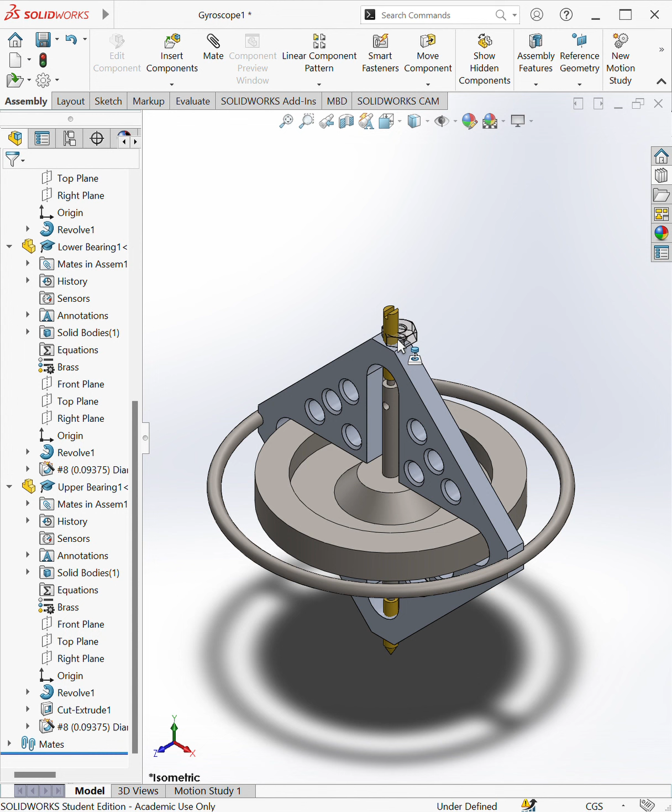Go to Design Library and then hold it, do not release your mouse button, and then hover over your bearing where it's supposed to be, and make sure it's at the bottom, also touching the screw and the frame as well. Then release it once you're happy with where it's supposed to be.

So right now it's not really where I want it to be, but it's fine. I can do mates later.

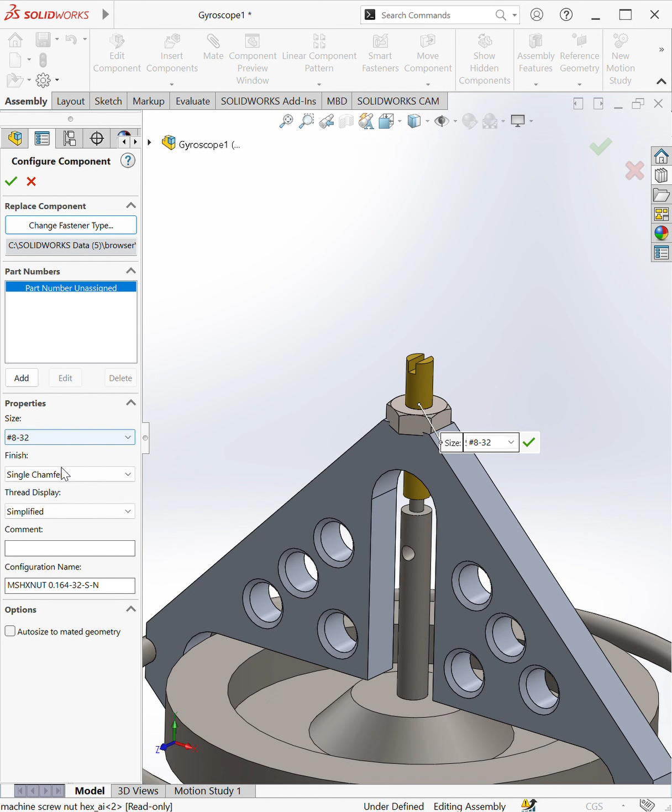What we want is our size to be 8-32 because all our thread counts are 8-32. Single chamfer is fine, simplified is fine, all of this is fine. Click OK. And now do not click the X yet because we want to do another bolt over here at the bottom.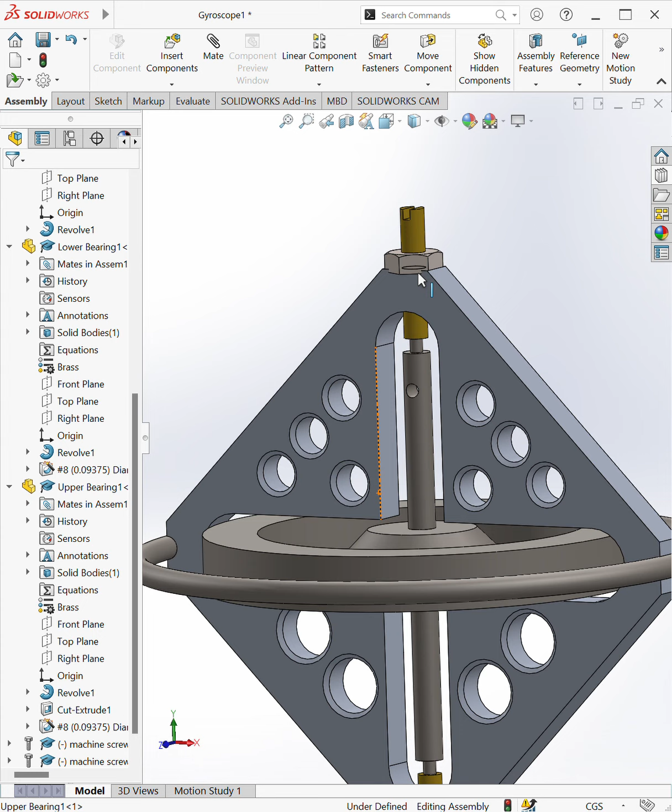Like that. And then now click exit. Okay, so we're done with that, but this thing is still very fidgety.

So you can click this face, hold control, click this face. I messed up. And make it coincident. And this one I think is already there. If not, you can do the same thing again.

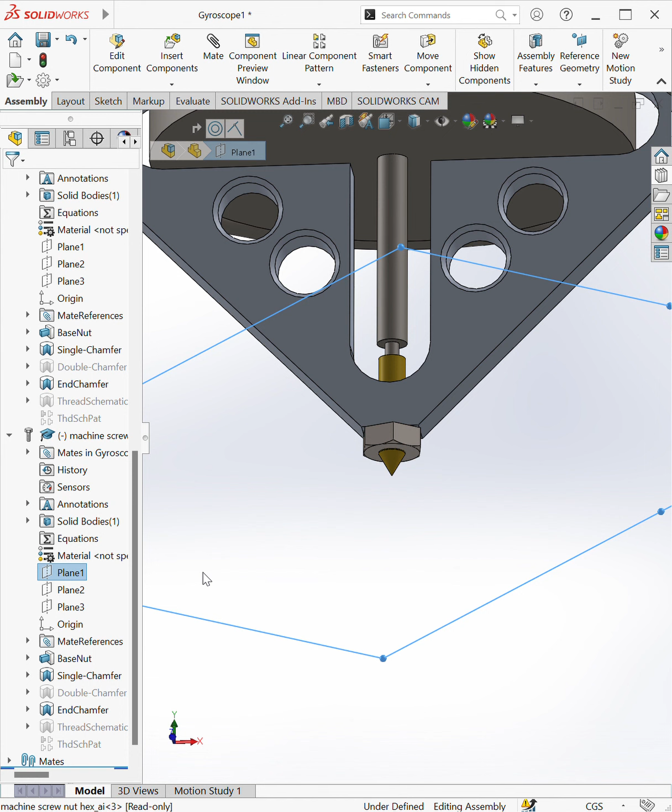If we really want to try hard, you can do the same thing we did for the upper bearings and lower bearings to make sure that they don't look like they're moving. Like saying the plane 2 is coincident with the front plane, and then for the other nut as well. I think this nut we just did.

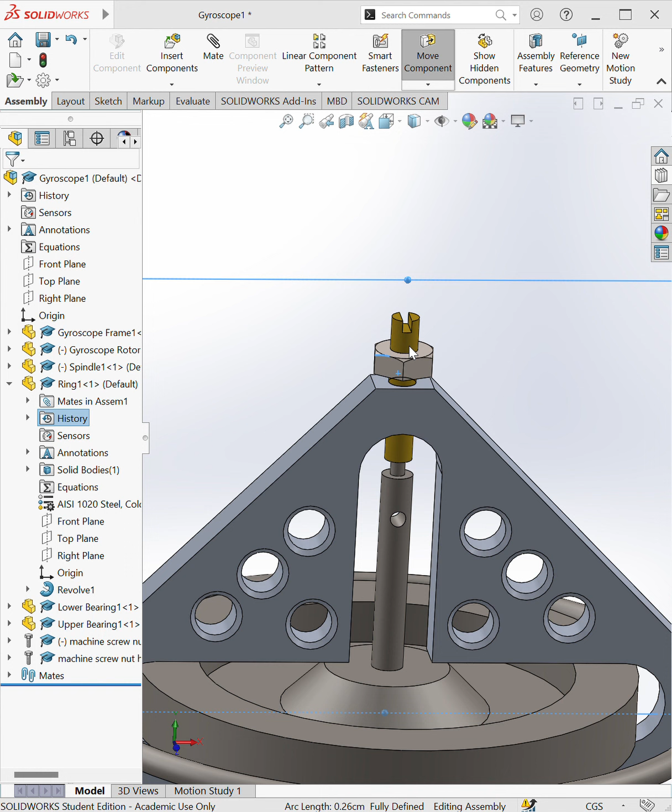This one still moves, right? Oh, this one still moves up and down. Weird. Let's just do the coincident again. Save it. Okay, now it doesn't move at all. Great.

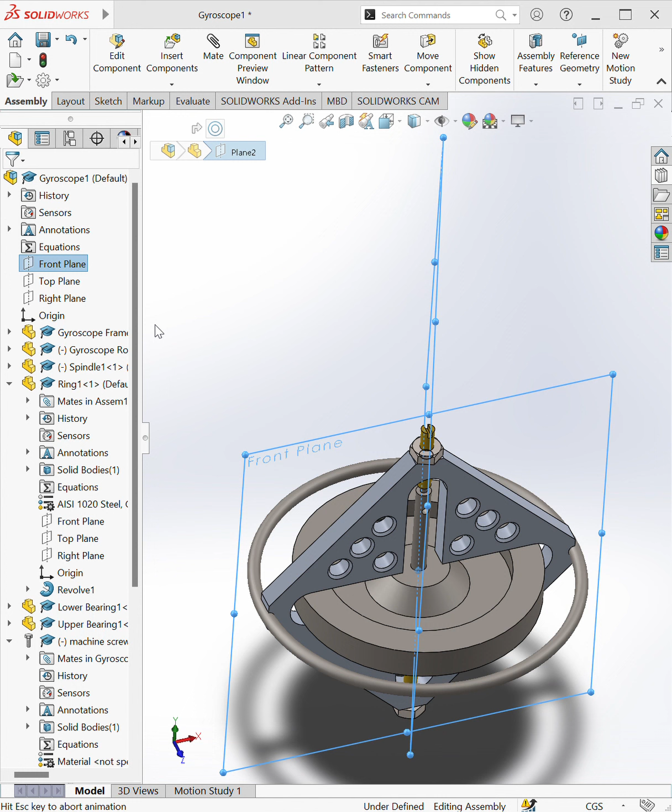This is the mate that we want. Make it plane 2, coincident with this front plane. You really don't have to do this, this is just my preference. And save it again. Control 7 for isometric view.

And now you are done. Now to export and submit it, go on the SolidWorks and hover over it. Go to File, and then it says here Pack and Go.

Click that, and it would give you this. You can browse where you want to keep your file. I'll keep it under Gyroscope tutorial and name it Gyroscope test, and then make it select folder. Oh, I can just do it like this. Just click where you want it, and then select the folder, and save.

No. Actually, this error shows up to me because I already have this part, but let me try again.

This Pack and Go, and browse. Let me put it somewhere else, like over here. Select the folder, save, and there you go.

It's done. You can zip it up, like right click, compress it to a zip file, and then upload it into your studio homework. Alright, that's the end of the tutorial.